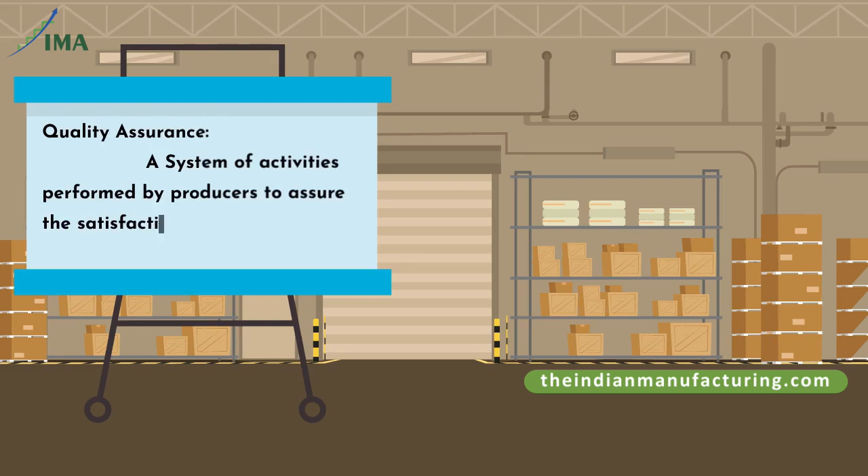Next we look at quality assurance. Quality assurance can be defined as a system of activities performed by producers to assure the satisfaction of the quality requirements of consumers. If a company is trying to achieve good quality of product in a consistent manner, with checkpoints for each of the PDCA cycle steps, then we can say that the company is having a quality system that assures the quality. Quality assurance is required at least in 3 areas.

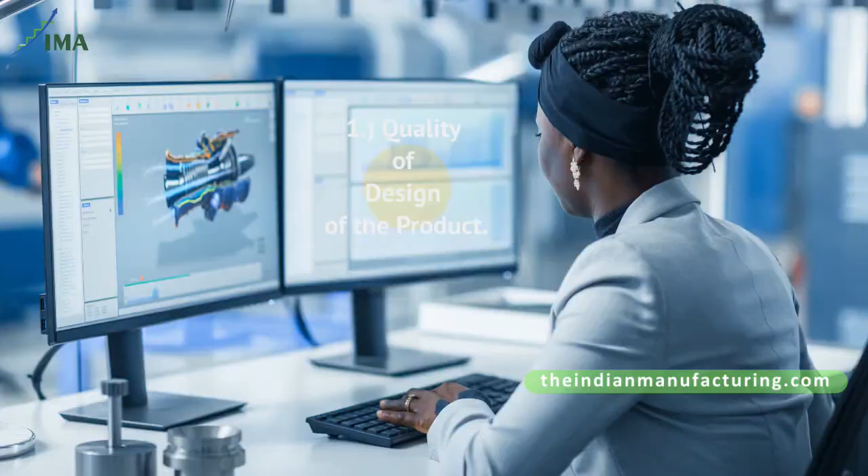1. Quality of design of the product. When the product is being designed, the quality has to be assured. Many a times, the quality of product is having a great influence from its design. If the product is designed for the usage very well, if it is designed for manufacturing, then there will be less of problems. If the design is not taking care of application requirements, and if it is not ensuring that it is designed for good manufacturing, then there can be several problems in productizing of this product.

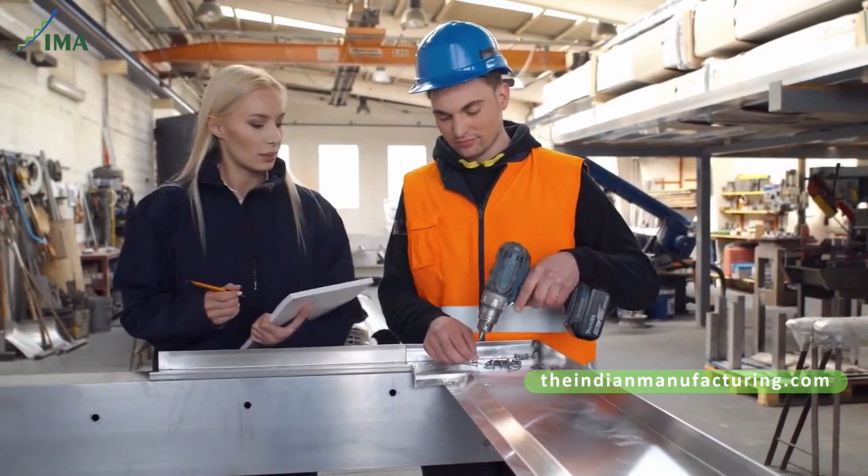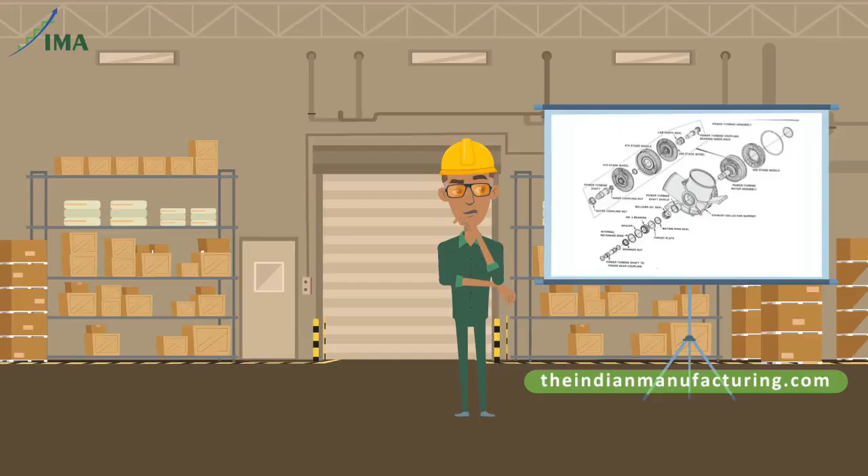2. Quality of production. This is the most common thing that is known to all. Production process has to be designed in such a way that the quality is assured. Each and every step of the production process has to be defined well, and the quality has to be assured at each step. Many companies may not have a clear manufacturing method for each step of their product manufacturing. The shop floor teams may be manufacturing it in their own way. This can definitely not help in assuring the quality. If every step of assembling a compressor is not defined, then the workmen will assemble it in their own way. The torques may not be standardized, leading to oil and air leaks at many places.

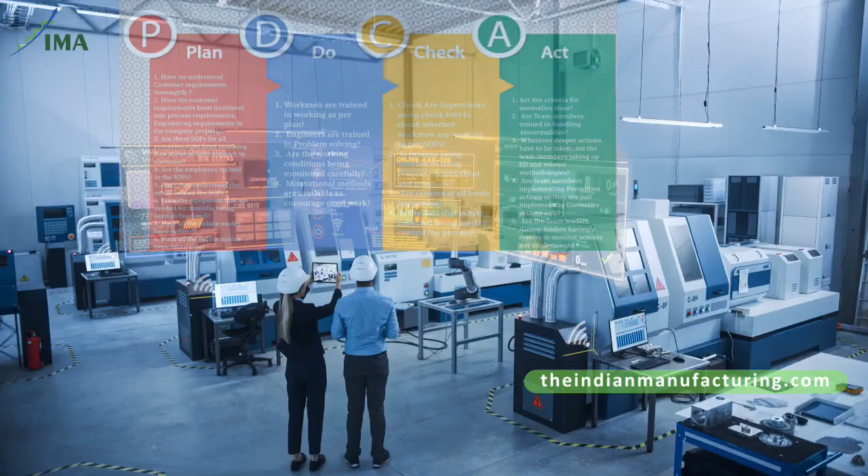3. Quality of sales and service. The quality of activity in sales and service also has to be defined, and it also has to be assured. The customer would look for a good quality in everything that he experiences from the supplier. The service function will have several touch points with the customer. Every touch point has to be defined well, and it has to be standardized. If a company wants to have a good quality assurance system, then it has to adhere to the checkpoints explained for each of the PDCA cycle. It is worthwhile for a company to define the QA system in detail.

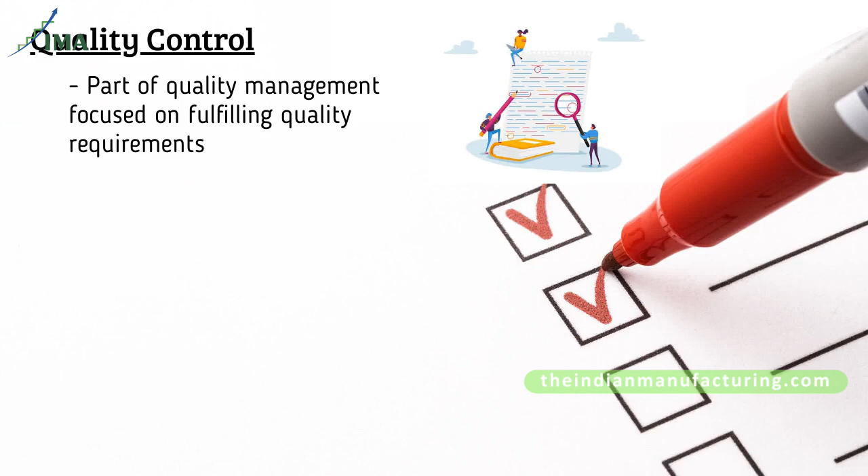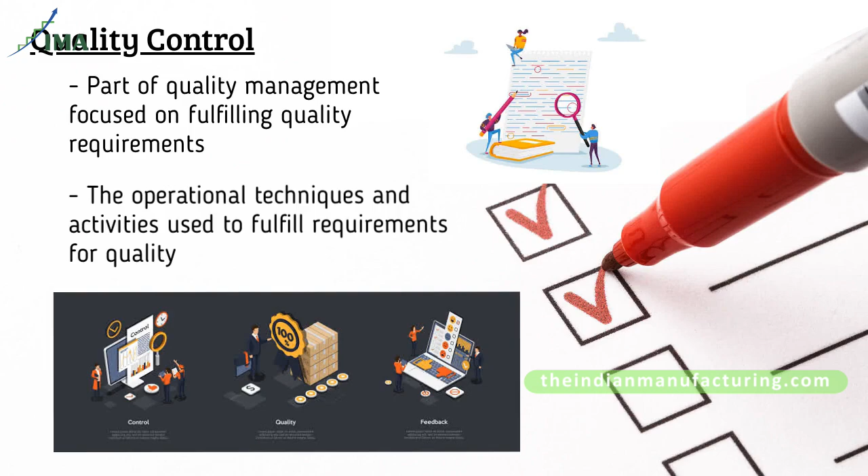Next we look at quality control. Quality control can be defined as part of quality management, focused on fulfilling quality requirements. While quality assurance relates to how a process is performed, or how a product is made, quality control is more the inspection aspect of quality management. An alternate definition is the operational techniques and activities used to fulfill requirements for quality. Quality assurance is a broader concept, and quality control is a more narrow aspect, referring to the actual activities of fulfilling requirements for quality. Next step in the process is your customer.

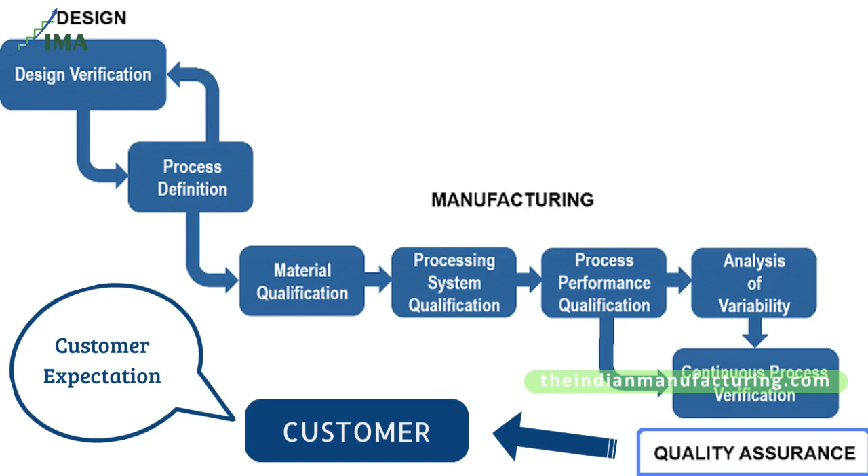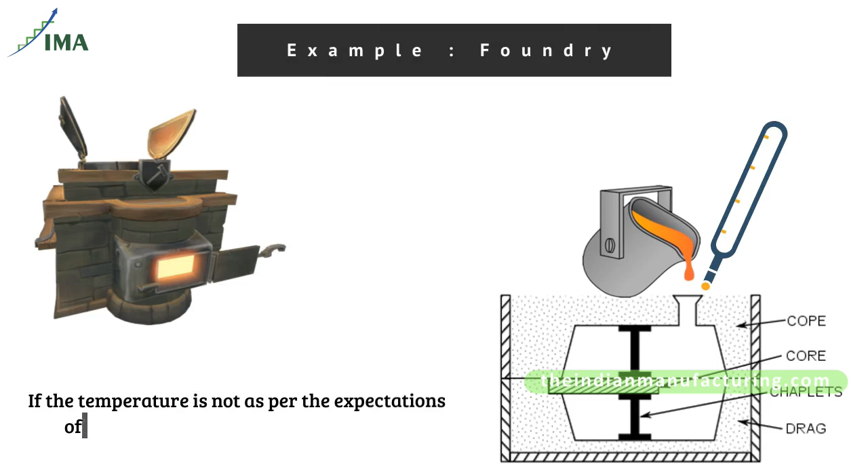The quality assurance system should consider that the next step in the process is the customer. The process in this step has to be controlled to deliver what is expected in the next step. If this is done consciously, then the product can be delivered to the expectations of the customer. In a foundry, the melting of the metal has to be done in the furnaces, and the metal has to be delivered to pouring at a certain temperature. If the temperature is not as per the expectations of pouring, then the quality is not okay.

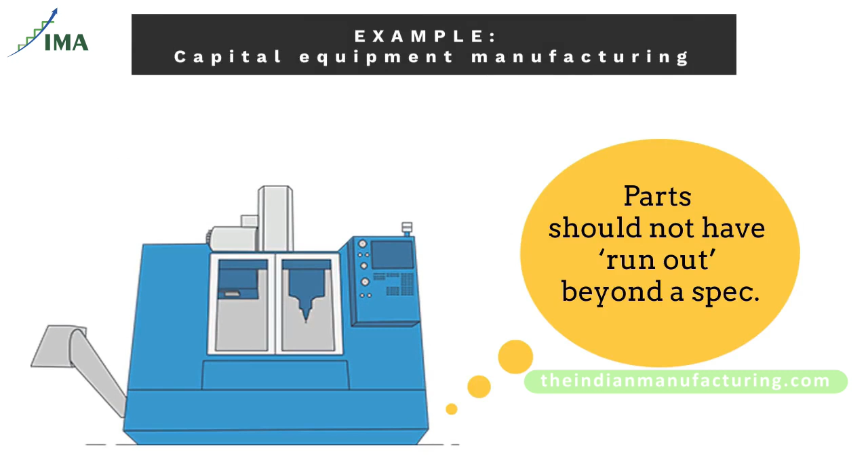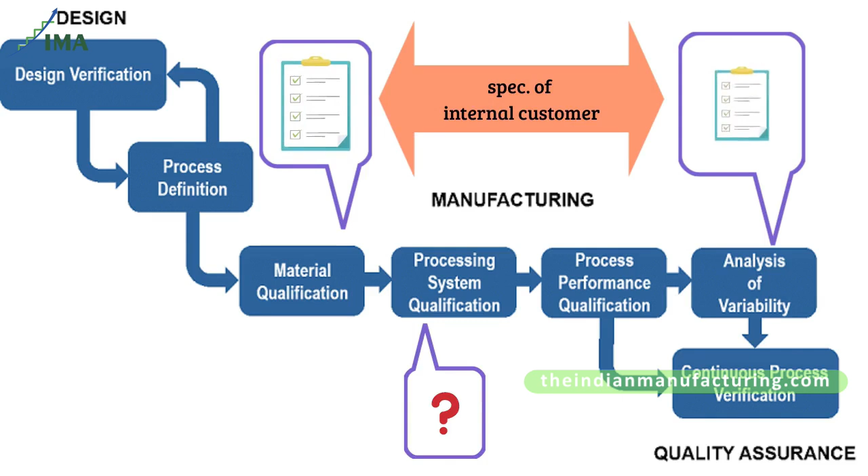In a capital equipment manufacturing company, if the parts should not have run out beyond a specification, then the machining process has to control it and deliver it within the right specification. If we work with the external customer specifications and do not have the specifications of internal customer at each process step, then it is difficult to assure the quality. We need to work on this and set up process control at each step of manufacturing.

Next important thing is quality in everything that you do. Companies need to promote quality in everything that they do. As explained earlier, quality needs to be established in design, production, sales and service. Beyond this, companies adopt a company-wide quality approach. Many companies adopt the Total Quality Management (TQM) approach.

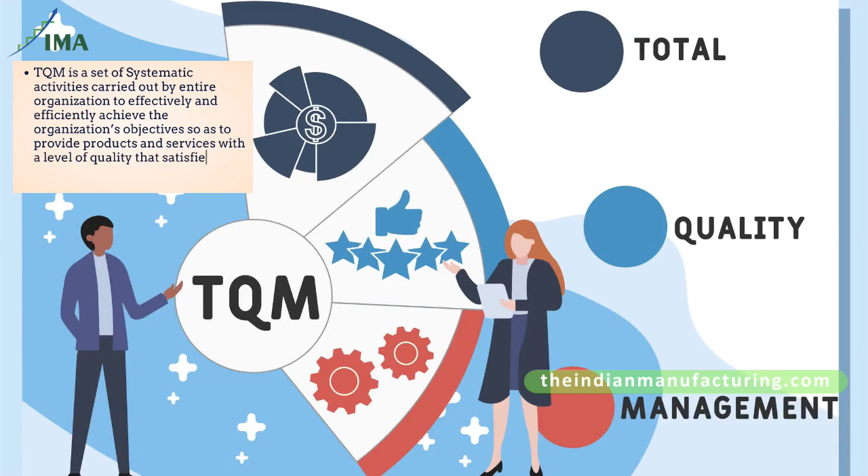TQM is defined as follows. TQM is a set of systematic activities carried out by the entire organization to effectively and efficiently achieve the organization's objectives, so as to provide products and services with a level of quality that satisfies customers at the appropriate time and price. The TQM practices are generally implemented across the organization. This is a process that takes a few years' time. Companies do this to ensure that the quality is improved in every activity that the company is engaged in.